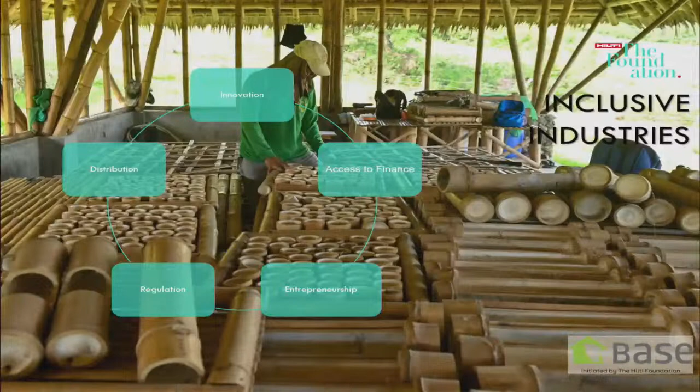The same is true for bamboo, and that's really where our heart is in the Philippines. About 10 years ago, a Hilti engineer started to work on a technology we call the cement bamboo frame technology. It uses bamboo as its sole structural element. It's a local product, tested for disaster resilience in our labs at Hilti, and it comes at a cost that is within the social housing subsidy schemes of the Philippine government. This is where we started to work a couple of years ago.

Until today, we've completed more than 1,500 homes across the country, units for low-income families, and we are planning to take on this journey and build with bamboo at an industrial scale in the Philippines and beyond.

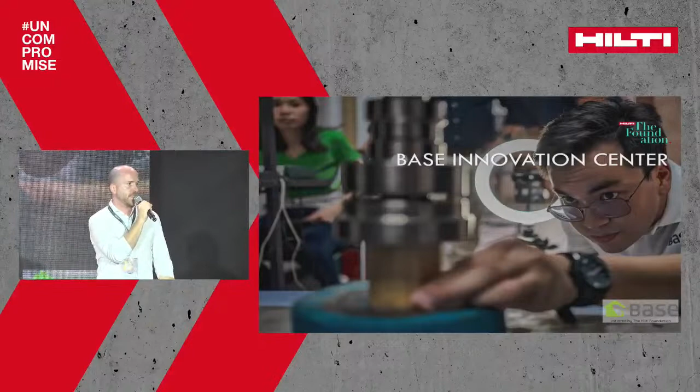For this purpose, we've opened a Base Innovation Center with our partners, the Hilti Foundation. It's the first and unique research center here in Makati that focuses exclusively on bamboo construction. We work with partners from around the world, universities, research centers, corporates, in finding the best way to make bamboo a building material for the future that is green, local, and disaster resilient.

We help establish a supplier industry in the country, making bamboo a standard building material for construction. In 2021, we opened the Innovation Center and opened it to developers of social housing. As a next step, we plan to bring this technology to other countries of the region, Nepal, India, Cambodia, Indonesia, to really make sure bamboo becomes a building material of choice, not only for social housing, but for the construction industry at large.

This is what we stand for as Hilti Foundation in our ambition to make construction better, also for low-income families. We believe at the core of our mission is making construction better and making our lives better for everyone, to be an inclusive company that drives our engagement beyond the business of today and helps everyone access a better life. Thank you so much.

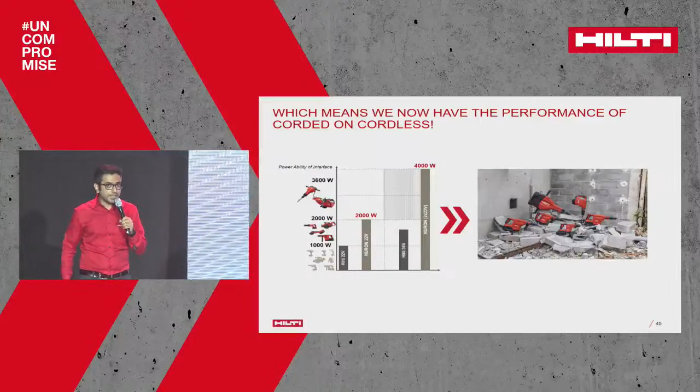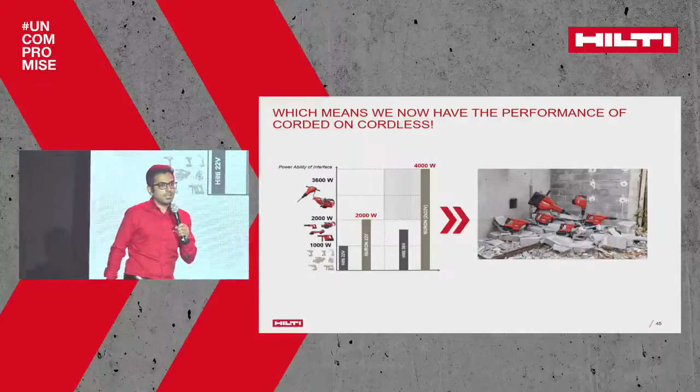This means that now we are able to achieve up to 4 kilowatts of power transmission through a battery platform, and that means your heavier applications, demolition, concrete sawing, structural bolting, heavy drilling, can all become cordless without compromise. That's the first way we are able to achieve outperformance.

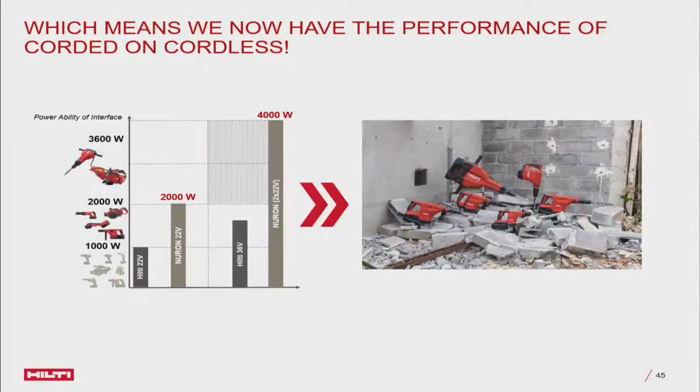The second major change is, of course, on the tools itself. They've been re-engineered, brushless tools, leading to better battery reach, leading to better performance, leading to better lifetimes. And all of this is possible on Nuron.

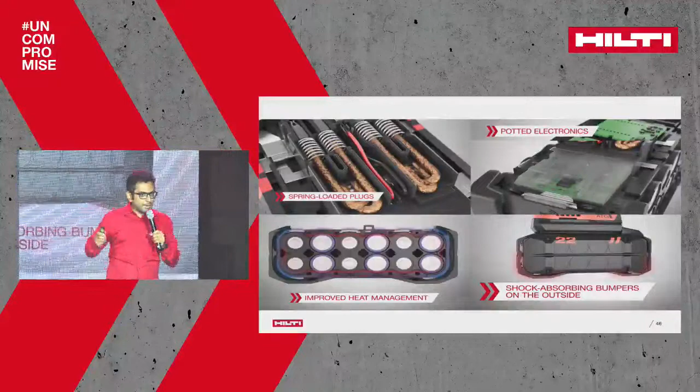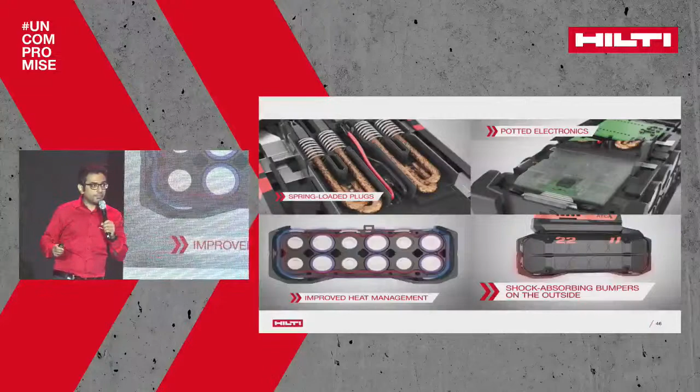None of this would have been possible without also improving the batteries. The batteries have been designed to supply the highest power demand applications. Vibration resistance, for example, when you use breakers, there's a lot of vibration being transmitted, and also bolstered through bumpers for shocks. And that's the way we are able to now bring corded performance on cordless.

But there's something more. It's the power of one platform. And what is one platform? A platform is essentially a voltage across which tools, batteries, chargers are all interchangeable.

In the past, if you had to go into light-duty applications, drilling, possibly small diameters, grinding, cutting, breaking, you would need multiple battery platforms. What would that mean? Every tool type would require a set of batteries and chargers stored in your warehouse, adding to your costs and adding to the loss of productivity.

Now, how does that change with Nuron? I present to you the power of one.

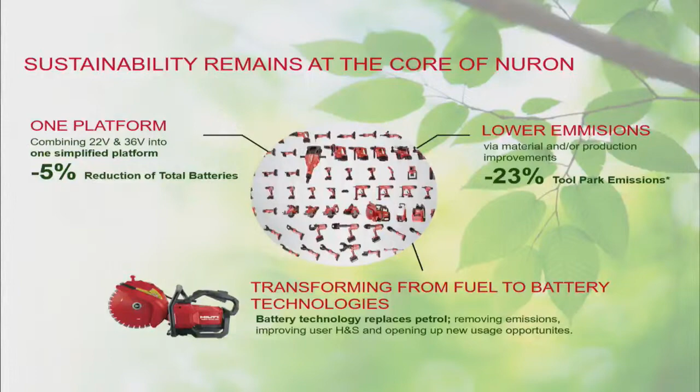Not just that - as you know, we still have tools in the market powered by gas. And with Nuron, we transition those gas-fueled tools into battery technology. So this is our commitment in terms of sustainability. Let's watch this.

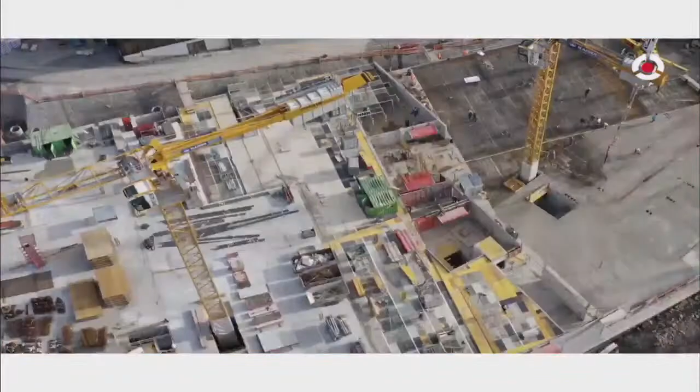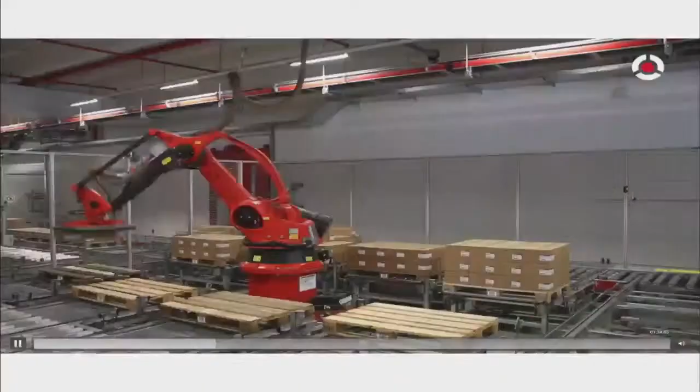We aspire to build a better future by caring for our environment. We have set ourselves an ambitious goal: we want to lead the industry in circularity. This means we strive for a more responsible use of existing scarce resources. We want customers to use fewer tools, but the right ones, by optimizing their tool park. We aspire to expand the use of circular principles in our product design. We use insights from our repair centers to improve the design of our products, including easy repair and reducing packaging.

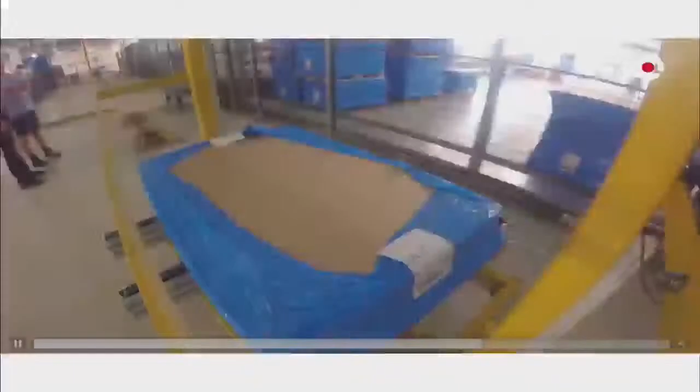We build products to last, and we repair them for as long as they are productive. We reuse tools in good condition for donations to a good cause. Where possible, we reuse spare parts in our global repair centers, offsetting the need to produce and transport new parts. We drive above market levels of collection and recycling in markets where we operate, ensuring materials can have a second life even when the complete product can no longer be used. We do this today and aim to scale this substantially in the future. Let us join forces to lead the industry in circularity.

So you've seen how Nuron is all about ending compromise in performance, in power, in productivity, in health and safety, as well as sustainability. But I'm excited, actually, because one of the biggest values that Nuron can bring, I'll save that for later because I'm going to introduce Daniel to share this. Come on ahead.

Thanks, AJ. Ladies and gentlemen, today is a special day, not just for Hilti, but for all of us. We want to make construction better all together with you. So today, from now on, our tools will have intelligence and connectivity embedded.

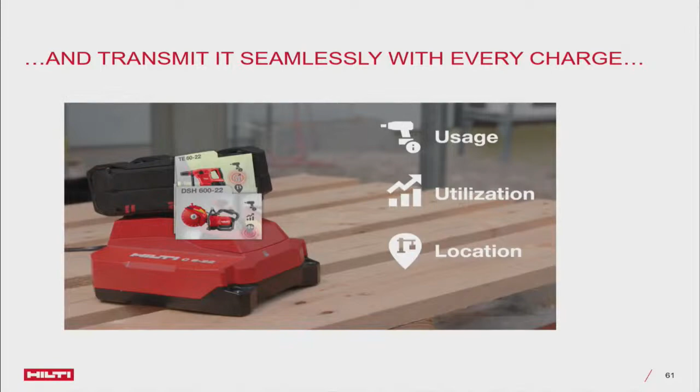Whenever the battery is charged and the worker plugs it into the charger, the data will be transmitted into the charger, and the charger itself is connected to the mobile network via a SIM card. Every charger has a SIM card. And the data is uploaded into the cloud, and once the data is in the cloud, you can access it via the mobile phone or via your laptop, and you can make informed decisions.

For example, how many of my tools are idle on the job site? How many of my tools are not being used right now, and for how long already? I can relocate those tools to a different job site where they are in need.

Or, how do I locate my tools when they are lost? I can't find them. So every time when a tool is being charged, the location, in form of a geolocation, is sent to the cloud, and you know where your tool is every single time.

Moreover, as we are moving to a cordless job site, you want to make sure that your tools do not stop working because of the battery. So you will have a full transparency on the state of health of your battery park. And even if a battery is reaching the end of its life cycle, you will get a proactive alert. And with a click of the button, you can replace the battery to prevent downtime on the job site in the first place.

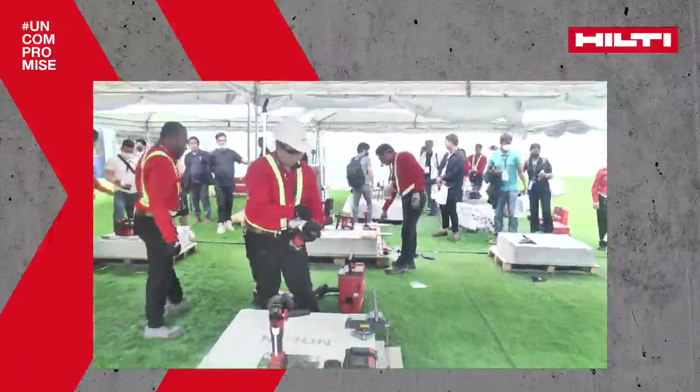So with the rebar application, usually we start with the rebar cutting. So when we cut rebars, what are the risks related? Sometimes you would twist your arm, the site workers would twist their arm, and sometimes the tool would turn off and you have accidents. So what are the two safety features of the AG60 angle grinder? The first safety feature is the SenseTech technology. Basically when the tool is on and I lift my hand off the grip, it turns off in about 2 seconds. Now, another safety feature, I mentioned twisting. So whenever a site worker experiences kickbacks or jerking, let me showcase the 3D ATC function.

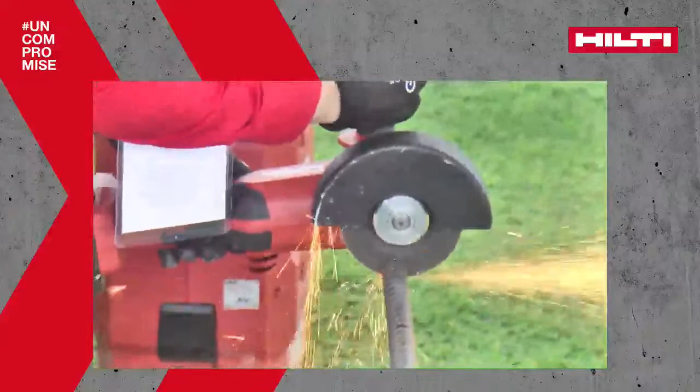It automatically turns off. Now, to see it in action, this is the power of the AG60 22 volt. What would be the next step in the rebar application? The next step would be drilling. For drilling, we have the TE60 together with our VC10 vacuum and the hollow drill bit. Together, this comprises our dust removal system we call the Hilti Safe Set system. Basically, you are ensured that your holes are properly cleaned and without dust.

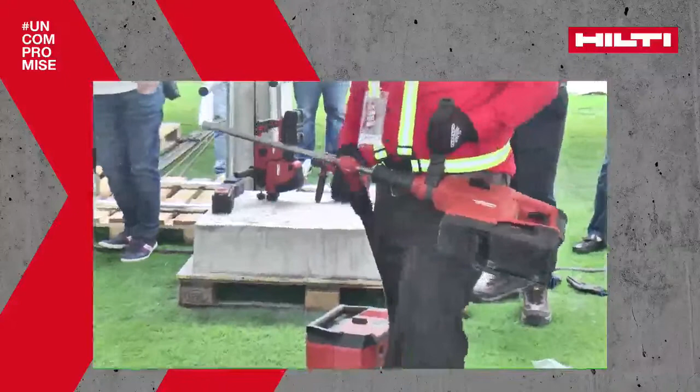So let me showcase the tool. We start with turning on the vacuum first, then turning on the tool.

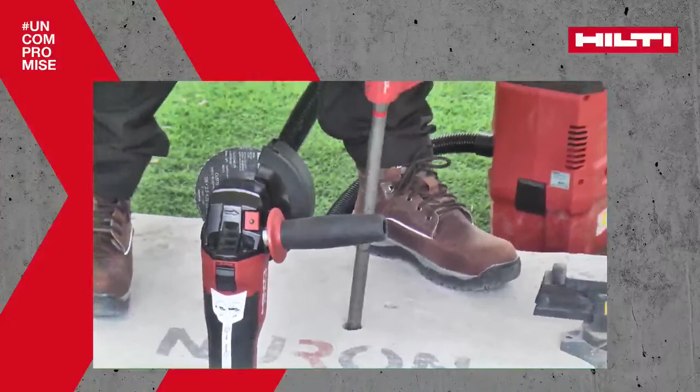So basically, I drilled a 200 mm embedment depth, and this drilling tool has ATC and AVR features for less fatigue.

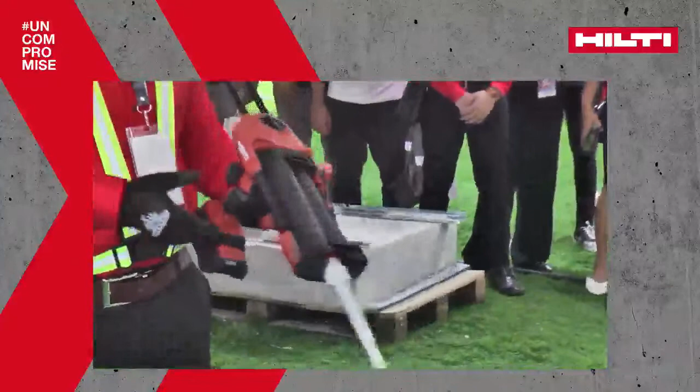After the drilling step, the next step would be dispensing the chemical anchors. For the dispensing part, we have our Hilti HDE 500-22 smart dispenser. When you inject chemical adhesives too low, you're compromising the structural quality of your connections. Dispense too high, and you're wasting adhesives. Let me show you how we use the HDE. You have a preset for 200 mm embedment, with a preset 47 ml volume needed. You can identify that with the Hilti volume calculator app.

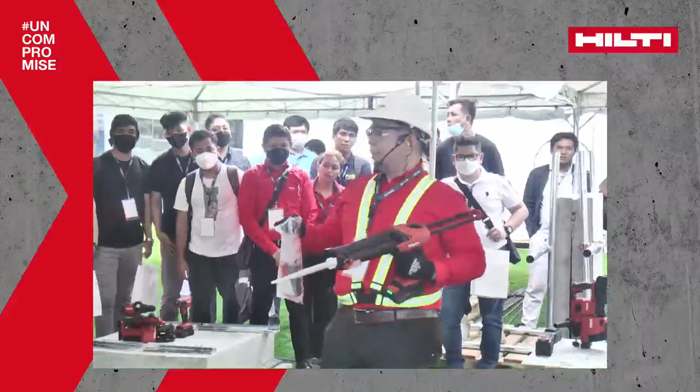Let's set it. Basically, one notch or one trigger is 1 ml. When using a dispenser, usually we have these first 3 trigger pulls that we throw to check if the chemical is properly mixed. This dispenser has the smart discard function, so no need to estimate how much volume of chemical you need to dispense when using this dispenser. I set it on the smart discard function. Wait for the chemical to mix. You hear the clicking sound, the chemical is mixed. Wait for the chemical to reach the tip of the nozzle, and that's when you use the smart discard function. That's the chemical needed to be dispensed before you actually have components A and B mixed.

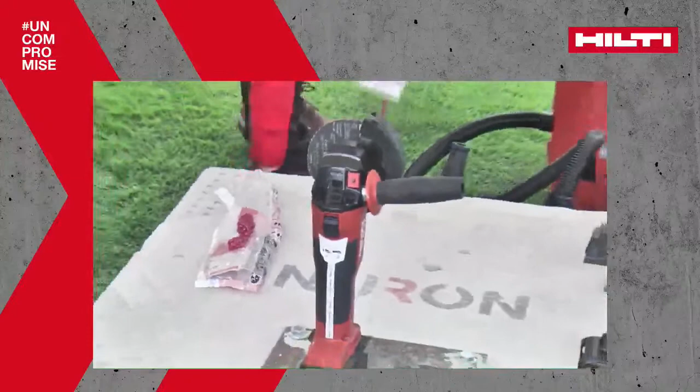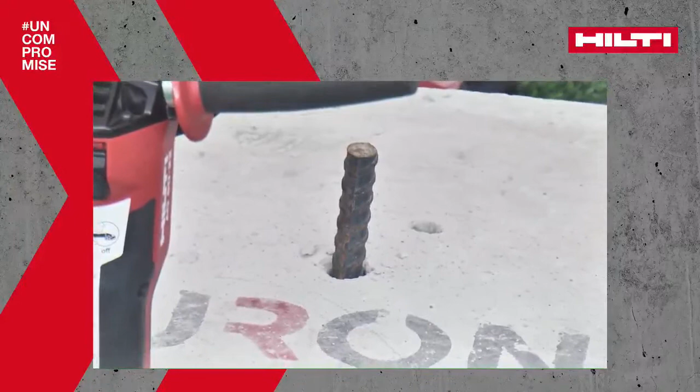Now we do the actual dispensing part. And now we install the rebar. We have this 300 mm length rebar with 200 mm embedment. As you can see, there's not a lot of wastage using this dispenser, the HDE. So you're ensured that your mortar wastage would not be too much, and you've used the right chemical volume for the right loading and the maximum loading. So that's it for the complete rebar application.

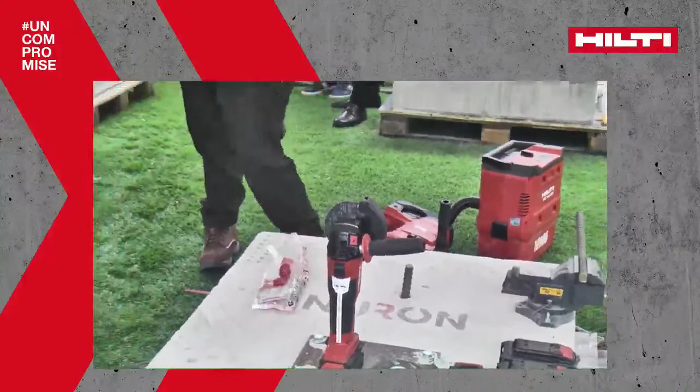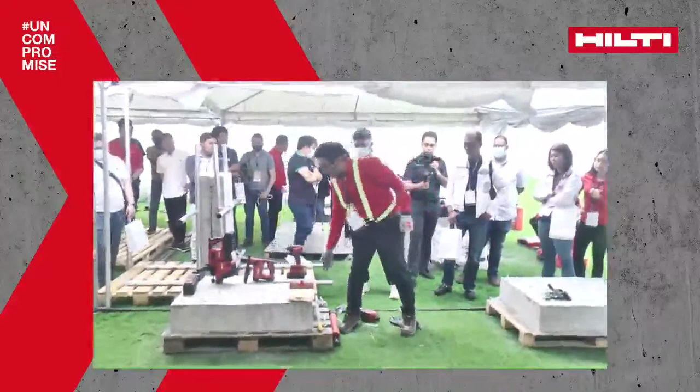Hello, hi everyone. Thanks a lot for the rebar demonstration. Now we move to something which is synonymous with rebar: base plate. We use mechanical anchors on occasion to fix plates like this. The critical elements required here are structural safety, integrity, as well as speed. But before we even get to any of the demonstration steps, what are some of the typical steps and challenges we face while installing mechanical anchors?

The first will be in drilling. Dust flies all over the place. If you hit rebar, the tool tends to turn, and that in both cases affects worker safety, right? The second one is on setting of the mechanical anchor itself. The setting requires two important parameters to be met. One is the embedment depth, which is very visual here. But the second one, which is much less obvious, is the torque. The torque is really important for mechanical anchors because this sleeve needs to expand, and that's what in the end takes the load which you will put from the structure. So these are the major two challenges which we have in setting mechanical anchors.

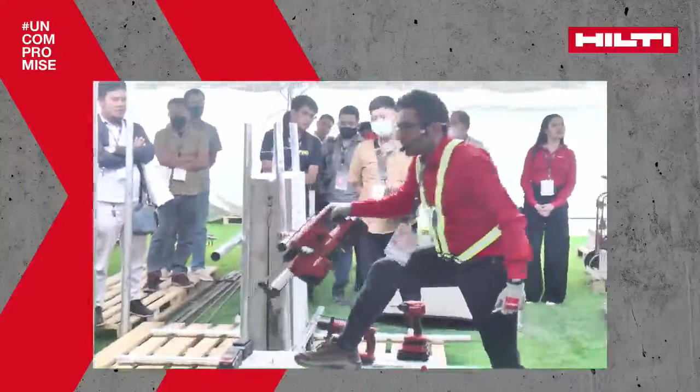Now let's see through a demo on how Nuron can solve some of these troubles. First, in the drilling step itself, dust we spoke about, right? So we have here an onboard DRS, or dust removal system. It's like a small onboard vacuum cleaner powered by the same battery, and it results in much less dust for the environment. The second one is on the other side of drilling, when you hit kickbacks. So let's say I'm drilling. If my tool turns, this is what the reaction will be. With ATC, you can see that the tool stops. The sound you hear is the DRS because my trigger is still pulled. So these are the two major safety functions we have on the TE tools that we have over here.

So let's get to it, we'll do a quick demo. And then I'll show you also how the smart impact wrench really can ensure the correct torque for your mechanical anchors. You can see dust is in control, nothing is flying around. Pretty clean. I'll do a second hole as well.

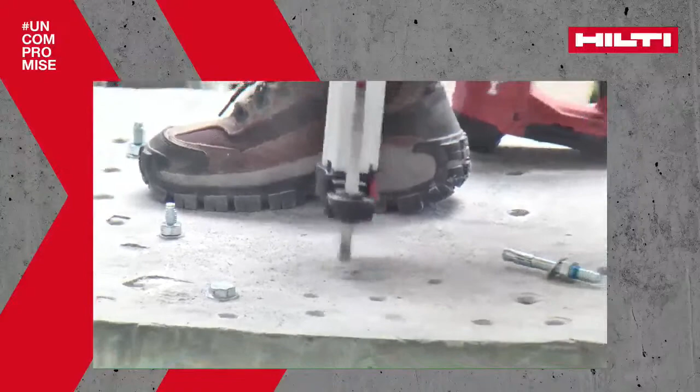So the dust is held right here on this onboard DRS. Now I need to install anchors, right? So I'll just remove this DRS.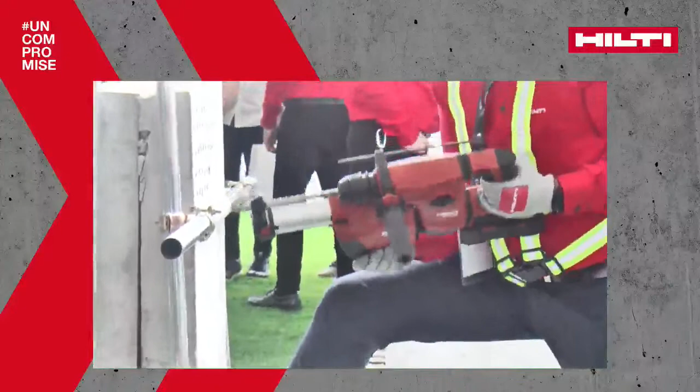Oops. Just a moment. Yeah.

I just remove this DRS. I remove the insert and I put in this setting tool. Now the setting tool is an alternative to hammering. The traditional method of installing an anchor is through hammering, right? So with this, all I need to do is put the anchor over here.

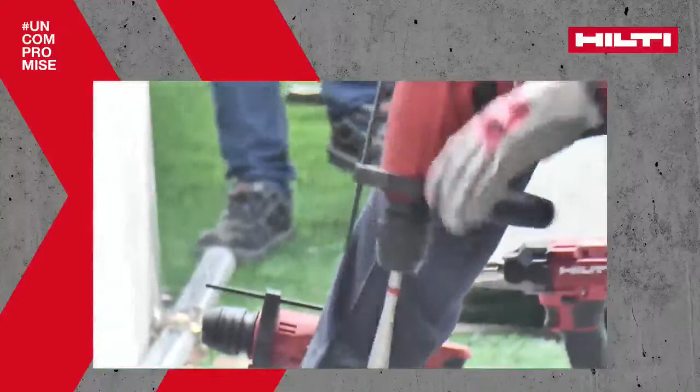Put the tool into chiseling mode. I change the mode from hammer to chiseling, and set it down. Similarly, I'll take a second anchor and repeat the same process.

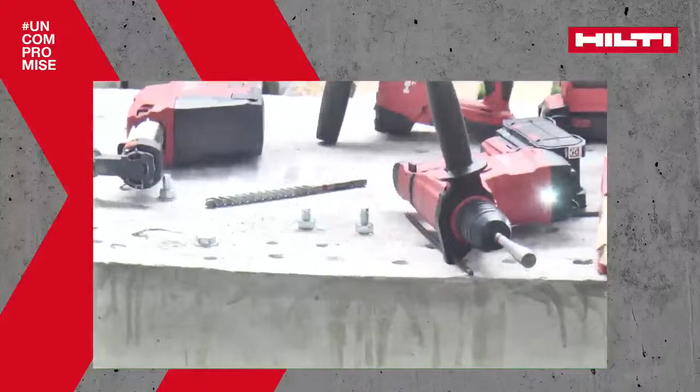So now my anchor is set, but it's not tightened. And the last and very critical step which is required here is applying the right torque. And for that, we have the SIW 4AT with an adaptive torque module, which I can use to set the anchor correctly and ensure it is neither over-torqued nor under-torqued.

So how does this work? It's as easy as scan, drive, done. Every anchor box has this QR code. I simply select a mode here on the tool, which is scanning the QR code. A green light gets detected, HSA M12 in this case, and that is exactly what is the anchor on this box.

Then I lock the tool. Done. This green light indicates that the correct setting torque has been achieved for this specific anchor. Not only this, this module also connects to your laptop through a USB-C cable, and you can document every anchor setting done on a job site to isolate the problem in case the setting is not okay.

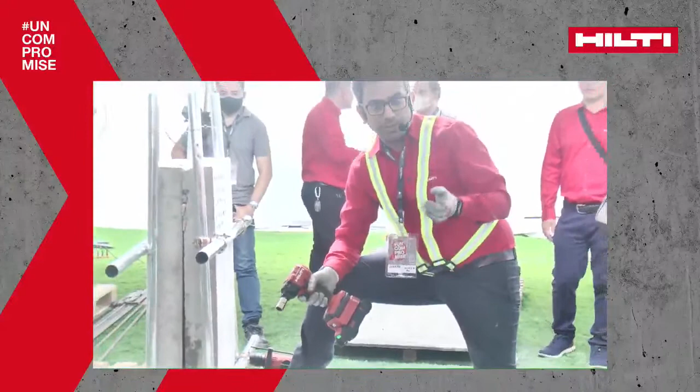I'll also take a moment here to show you what happens in case I do not torque right on this anchor, for example. The red light. So if a worker, for example, does not pull the trigger long enough, does not let the tool take care of itself, this red light will come on, and in the report, you will see a not okay indication.

So to summarize, with these technologies, we can not only add safety to the job site, but this also ensures safety of the structure and a much faster and safer installation, reducing the need for pull-out tests, for which we spend significant time after the installation phase is over. So with that, we can now move to the next step, which is a very exciting booth over there: demolition.

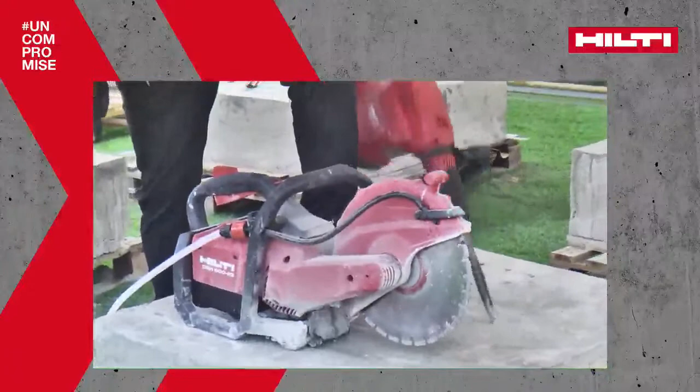We will be starting with our DSH 600, which is a concrete cutter. Our light duty chipping gun, which is the TE500 22 volts. And our bad boy right there, the TE2000, which is our 21 kg demolition breaker.

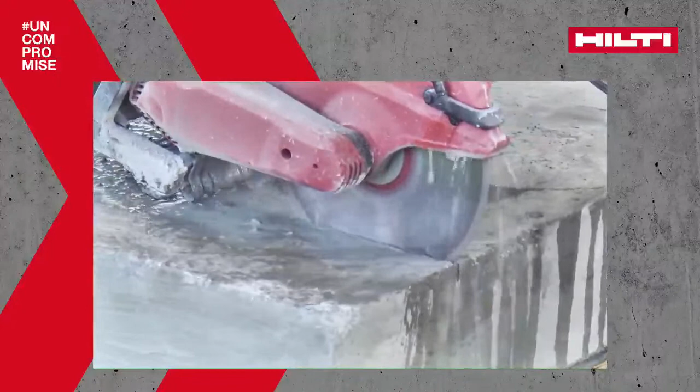And I will give you a sample of how it performs. So we will be cutting through this concrete and then afterwards, we'll chip it off as well. So you guys can see how smooth we cut with our DSH 600.

So this time, I'll be showcasing our light duty breaker and then the heavy duty one. Thank you, Miss May. This one also performs on a 22-volt battery platform. So again, within the market, its performance matches that of the corded versions of this breaker. As you can see, we can demonstrate how strong and efficient it is when used in actual job site conditions.

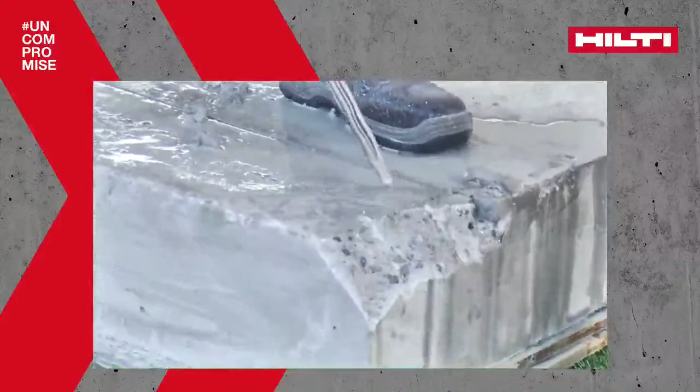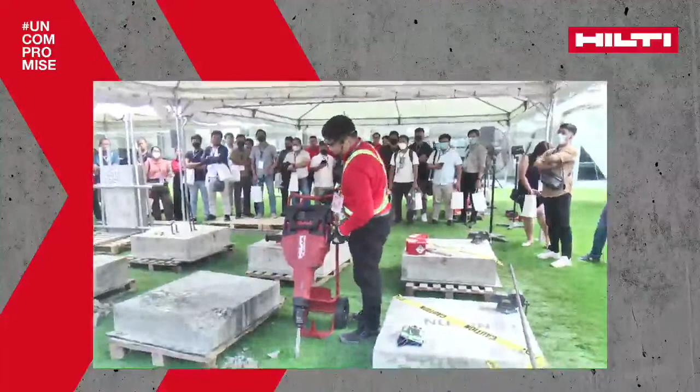Alright, now then, I'm excited to show you how this bad boy performs on breaking concrete on your job sites. So everyone, can I hear a chant of excitement from the audience? Do you want to see this perform right now? Alright, let's do this!

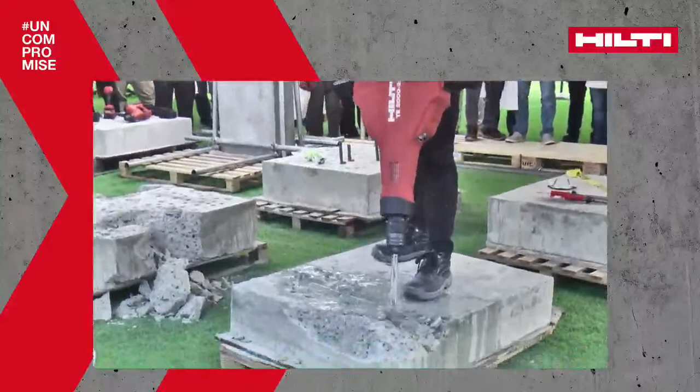In 3, 2, 1... You see how powerful the tool works, right? It breaks almost effortlessly using this one.

And I do hope that you find our demonstration both exciting and inspiring. If you'd like to try these tools, we would be glad to assist you afterwards. Now, I turn you back to Sharon for that last booth. Thank you so much!

Okay, welcome back everyone, we meet again. So this booth is more about woodworking, and formwork is a very standard application we have on all of our construction sites. What we will cover here today are the 3 major steps in that: cutting, driving, and drilling. So that is what we will cover in the formwork booth today.

So the first tool we can talk about is the SF6H, a drill driver. Now, we have quite a lot of drill drivers out there, and again, what I'd like to highlight is one of the safety features we have. It's called ATC. When you're drilling large diameters in steel and wood, there's a pretty large tendency to sometimes get a kickback, especially when the application is intense.

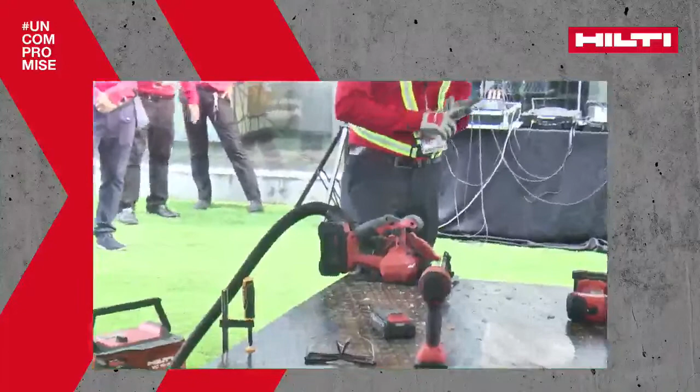Then we have our all-new cordless wood cutting saw, a power pack tool. Brushless tool, it gives unmatched performance, better lifetime, better cutting speed. I have double boards here just to make the application a little bit more tough and fun, and you can see later how this tool performs. Also, the same vacuum cleaner you saw in the rebar booth can be used to connect to the saw so that wood chips are held inside and safety and cleanliness are preserved.

So what I'll do here is a quick demo of the SF6H. Not only can it be used to drill, but also for occasional driving of screws. Here's the performance of a 25mm spade bit in double board plyboard.

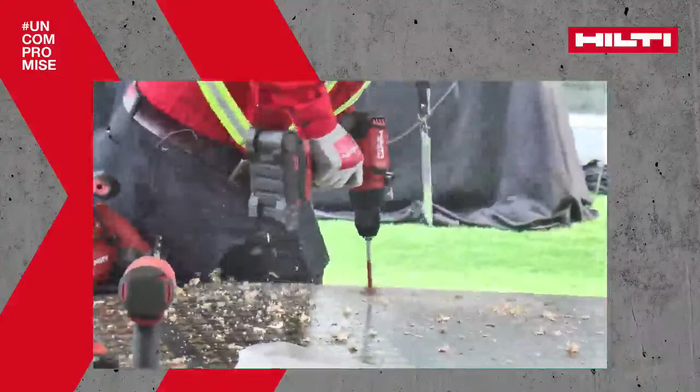It goes pretty fast even through 2 boards. And even if we increase the application diameter to 100mm on a hole saw, it will still have good performance. So that's on the SF6.

Now let's talk about the SC6WL, our wood saw. Cutting plyboard is pretty common, it's one of the first steps of the formwork application. We usually cut only 1 board at a time, but in this case, just to show you the performance the tool can bring, there are 2 boards which we are trying to do. It's connected to the vac.

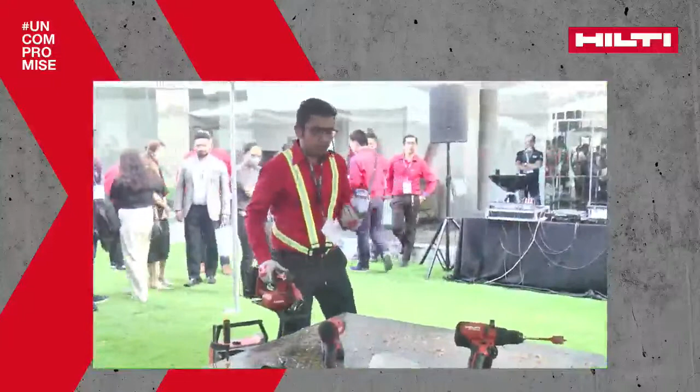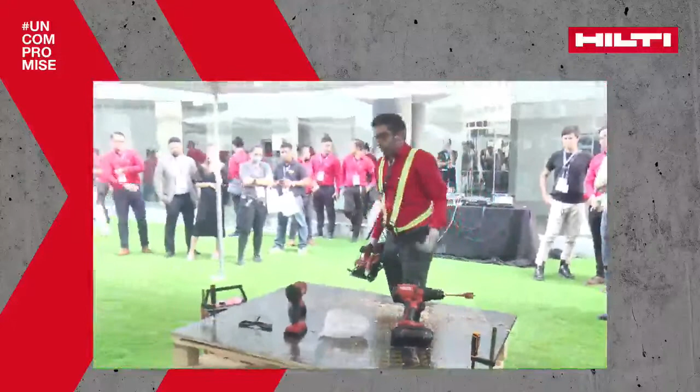One-handed smooth cut. As simple as that, it cuts like butter, no need to push, the wood comes to the tool. And that's double board. It can give good competition to even corded tools, and we are happy to conduct that demo on your site as well.

So yes, that's it for the woodworking section, and I hope you enjoyed the demo today. In case any of you would like to try the tools, please feel free, you're welcome here, and we're happy to answer any questions. Thanks a lot.

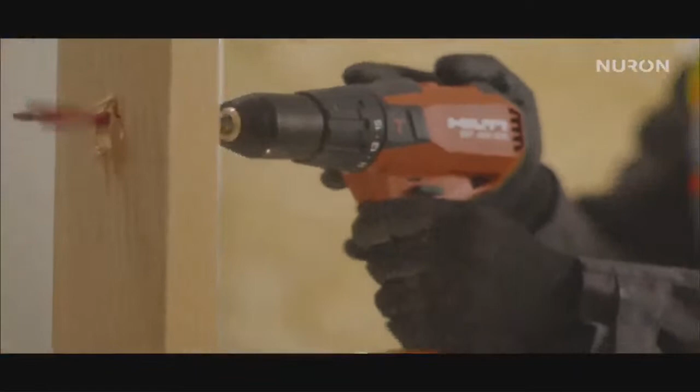How about that? Compact and efficient, a cordless hammer drill driver for tight spaces and overhead work, including masonry. Plus, this offers high RPM and torque with Nuron batteries, durable design with full metal chuck, a brushless motor, and optimized cooling. It has safety features including active torque control and LED work light. What's more, the Nuron battery platform ensures long-lasting performance and productivity with energy-saving drill bits and additional services. If Apple had a construction tool, if an Apple went to the gym, because this is really beefy and strong, it would look like this - full of innovation, full of ruggedness, and of course a very useful tool.

Somebody's got to win it. It may as well be some of you in here, right? So without further ado, let us call on Anne and Rain on stage to do the honors.

All right, are you ready? Maybe we should get the dancers up here again, and then we can officially have a rain dance. I'm warning you, these jokes just write themselves. I'm sorry, thank you for the sound effect.